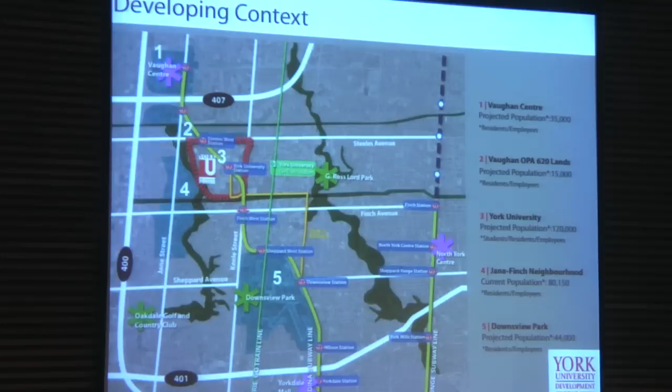Then when we move down the corridor, we see the Jane Finch neighborhood, which currently has 80,000 people. And if you look at Downsview Park, there's another potential population of 44,000 people. The issue that we're now looking at is how, with all this potential population, do we get the best quality of growth and the best economic value for our land, given the competition up and down this corridor. This is just one corridor.

If you look in the news, which is hard not to, we're talking about Sheppard coming along. We're talking about Eglinton coming along. There's enough population theoretically planned in these various corridors to take up Toronto's growth for about the next 100 years. The issue we're facing here at York is how do we capture our share in the highest quality of growth in and around our subway stations that are being built.

Whoops. Where's my slide here? Currently, within the campus, we're looking at a master plan. For our master plan, York has hired the services of Ken Greenberg and the Planning Partnership. Donna Hind is here from the Planning Partnership, and Ken and Donna have taken York through a series of consultations looking at how we can start to frame our conversation in and around the campus. And coming out of these consultations, there's three main lenses through which they're looking at the growth in and around the campus.

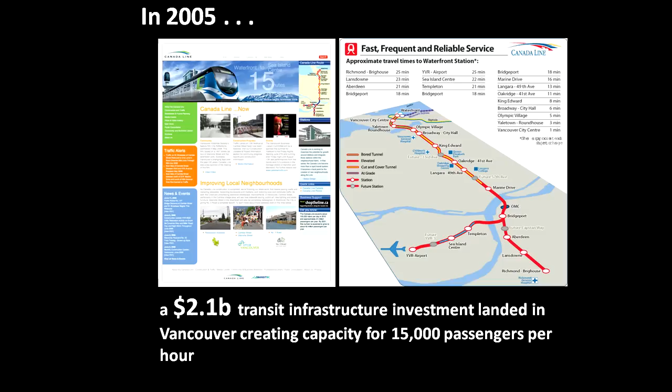So to start on this, as was mentioned, I moved to Vancouver in 2004, and about the same time a plane load of dollars landed from the federal government and other places to pay for some transit infrastructure. So in 2005, all of a sudden, I won't say out of nowhere, but we didn't have it before, a significant amount of money landed into Vancouver to create capacity for a transit line that did not exist at the time. And that transit line ended up being a very important one. First, it joined two incredibly important destinations, downtown and the airport. How important is that?

But it also passed along a street that was one of the significant heritage boulevards of Western Canada, and it also passed through many of the established residential areas of Vancouver. So it was about to reveal lots of questions and lots of opportunities here. Not the least of which was an answer to the question, how big a hole do you have to dig to bury $2.1 billion? And generally, depending on how you go about it, technology matters here. If you do cut and cover, it looks like the one on the left, and if you hire a boring machine from Austria, it looks like the one on the right.

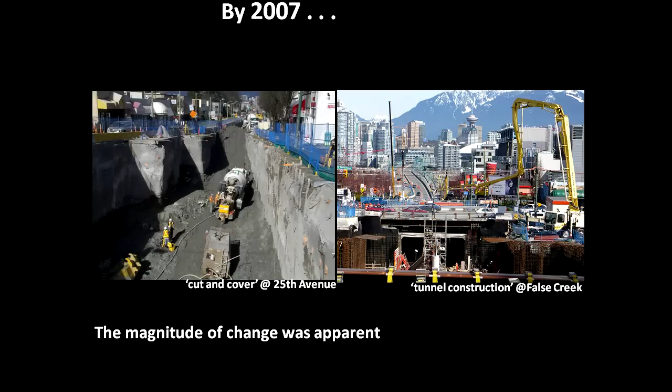Even though this dropped out of the sky in 2005, it did not take long for it to have a very large footprint and a very large in-your-face presence for many of us in Vancouver. By 2010, we'd all forgotten about the hole and all the other horrible things that happened along the way, because the line was an incredible success, far more successful than any of the transit planners had thought. There were lineups to get onto it, not just because it was a new line, but because it joined these two significant destinations, downtown and the airport, and the Olympics were coming, and it joined many of the significant venues along there. So all of a sudden, $2.1 billion creates all this capacity that people just glommed onto almost immediately.

And as a matter of fact, that line met its year 3 ridership goals in the first year and has not slipped as much as you would think. It has slipped a bit from the Olympic year, but it has not gone back to what it was before the Olympics. It's actually seen a significant increase in ridership. So there's no question this was a strategic and successful investment to have made from a transit point of view.

With that in mind, the question about, well, what kind of city does one start to pack around that all of a sudden elevates? We have a major infrastructure investment, 19 kilometers long. We have a whole bunch of people that want to ride it. What kind of a city do they want to ride to and from as they move along it?

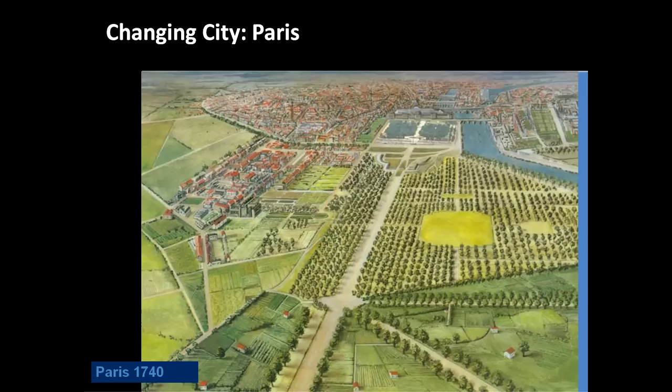And like many of you, I'm sure, are aware, there's a very significant trajectory to all the big infrastructure investments we make. And as a matter of fact, things like street networks and transit infrastructure are among the most enduring, and they last for hundreds of years. And if we just think about some of the cities we love, it's kind of humbling to remember that I'm not sure what they thought about in Paris in 1740, but I hope they thought about the right things, because Paris today still has the remnants of some of those important moves. So it was one of those moments where just thinking about how significant the choices about what city would attach itself to that infrastructure became.

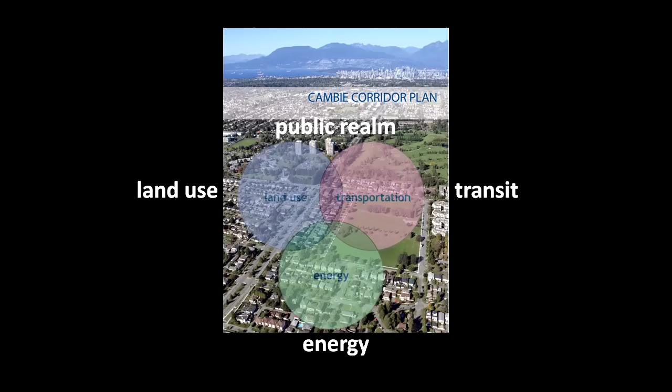So out of that, there's a series of themes that run through today's discussion. The two on the horizontal axis are the ones that are probably what you expected to hear about. That is the relationship between land use and transit, and we'll certainly talk about that. But the ones on the top and the bottom are no less related to the success of the ones across the middle. And that is the relationship between energy and the future of cities. We have to be smarter about how we plan to distribute and allocate low-carbon energy sources in the future. We need to start planning our cities around how that flow works. And then on the top, the notion that all of those investments have to create some kind of public domain in which we feel proud to inhabit.

So here we are in 2010 or so, got transit, need land use to accompany this. And just to touch on a few of the important themes here, one of them, of course, is density. And the reason I bring it up is not because I don't think you know that, but there's a little subtler piece in it that you might not think about quite as much. And that is that the relationship between transit technologies and density is basically linear. The more sophisticated the transit system and the more passengers you need to ride, you need to make sure that along that route are sufficient passengers that are going to provide the ridership that will make that transit journey successful.

So if you look on the right, the kind of system that we're talking about here, even though it's a subway, there's a big hole, it has a kind of light rail scale to it. And that's the way SkyTrain works in Vancouver. They're smallish trains and they just run frequently. So they're not long trains like you have in Toronto. They're actually quite short trains. So in order to make those successful, we're looking at places that need to generate about 150 to 250 people and jobs per hectare. And it's the people and jobs part that's significant here.

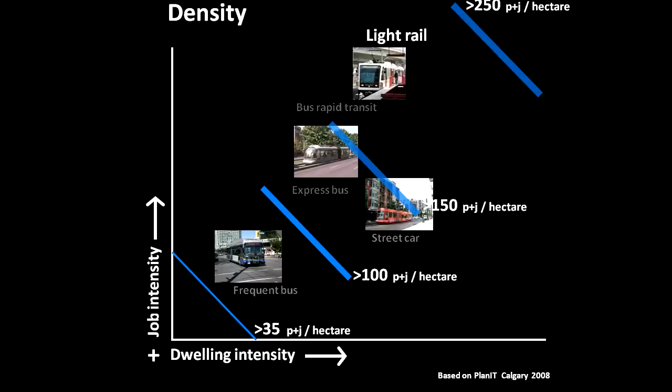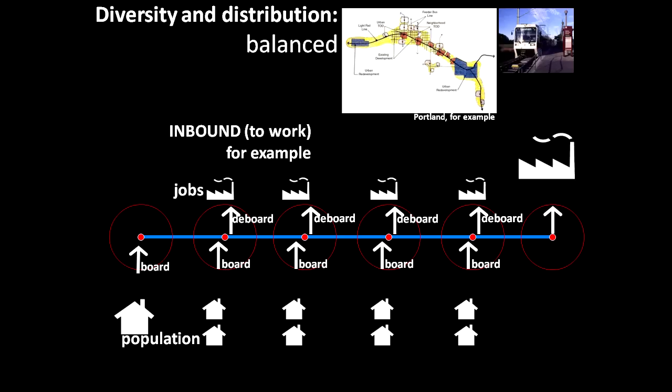So again, I don't think you don't know this, but what we really wanted to get to here was not only 150 plus people along the corridor that are likely to get on the train at least once during the day. What we'd really like them to do is get off and on at regular intervals so that the capacity of the train can be better optimized for that passenger load, right? What you really don't want is the situation like they have in Calgary, where we did some work a few years before, which does the opposite, which puts all the jobs at the end of the line and all the people at all the stops along the way. And so the train just gets fuller and fuller in the morning as it goes in, and then it's empty most of the day, and then it's full as you go back.

And as a matter of fact, our City of Calgary colleagues were always joking about the fact that if you lived beyond about the midpoint station along the way, what you'd do in the morning is take the train out to the distant suburban one so you could get a seat and read your book coming back in the other way. So not only does it make economic sense, there's a certain quality of life component to this that's not small.

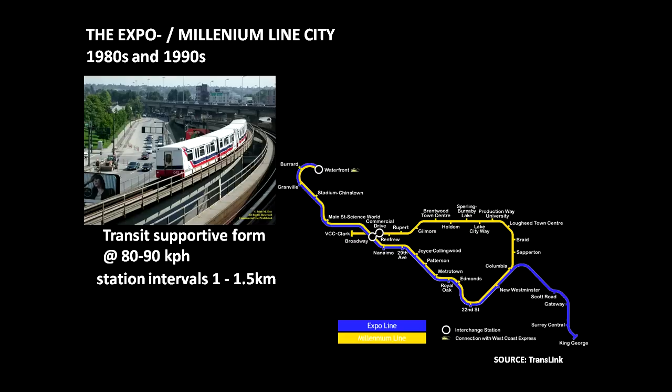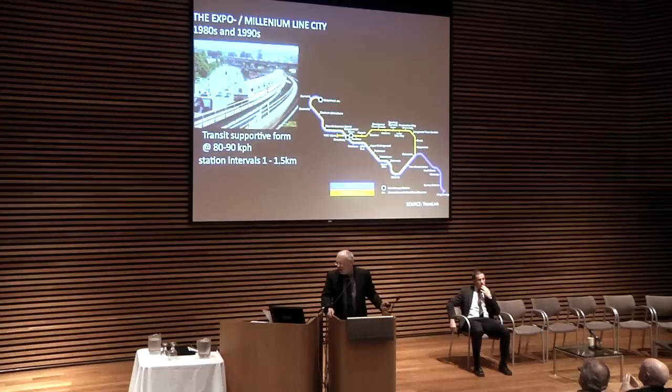The other thing is that Vancouver's had SkyTrain technology for about 30 years. And what have we learned from that? Well, what is the city that gets shaped by transit according to the way we've been shaping it by transit, at least our most recent experience? And so the question was, at least to the Cambie corridor group, okay, if we now know that if we want to move people around at about 80 to 90 kilometers per hour at stations that are about 1 to 1.5 kilometers apart, which is kind of what TransLink wants you to do, you need to start thinking about how big are those stations.

So again, if you have to get 150 to 250 people or jobs per hectare, and they need to be in walking distance of the station, that's a pretty dense little node. And depending on how far the stations are apart, there may or may not be much in between, because it may have sucked up all the development that might have happened in that area.

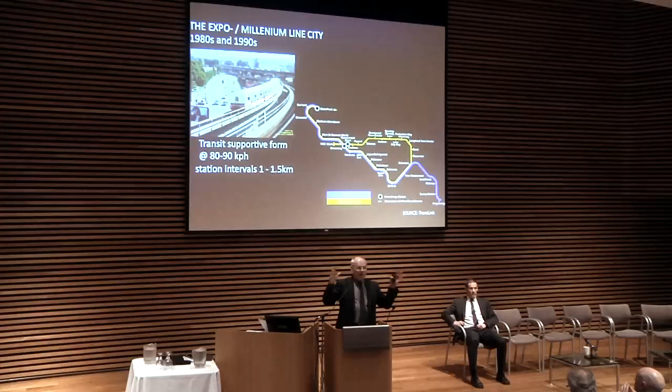So the question for the Cambie corridor team was, all right, so if we don't want to do that anymore, we need to do a better job of thinking about, well, how does the public realm have presence in this? And so one looks back at, well, how did Vancouver do this in the past? And there were times, not that long ago, relatively speaking, where we kind of got it.

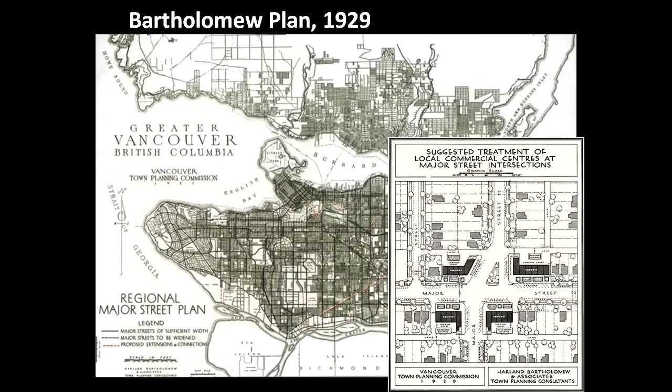The Bartholomew Plan in the 1920s and 30s really was a plan that laid out major road networks, which could be major transit networks today, and then looked at the development patterns that one might attach to them and insert in them. So this diagram, while it has absolutely nothing to do with the Cambie corridor, has a lot to do with a way of thinking across scales and thinking about how big moves that happen at a regional or city scale need to be backed up by smaller moves that happen at a pedestrian and neighborhood scale.

A way to think about this is I kind of think about planning across these scales as like the Russian doll problem. There's a scale inside a scale inside a scale inside another scale. So the question would be, if we think about how different decisions are made at different scales, what would the new transit town look like if we started to kind of look at where the flow and connectivity of decision making might be?

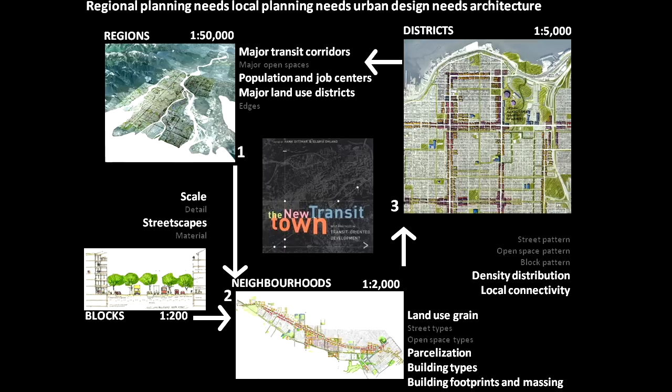So this one's way more complicated, but it's the same point. So if you kind of look at what might happen at a region scale, 1 to 50,000 maps, for example, and how there might be other choices about how those major transit corridors, population and job centers allocate themselves to specific places within that region, and so on and so on. So the trick is how do we figure out how to move back and forth across those scales, make the right decision at the right scale, or certainly not contradict them, perhaps, would be another way of thinking about that.

So that's the preamble to the plan. The last few slides before I hand this over to Jim have to do with the planning culture, and this is as much a part of a little reflection on my education about going to Vancouver as it is on something that might be useful to you.

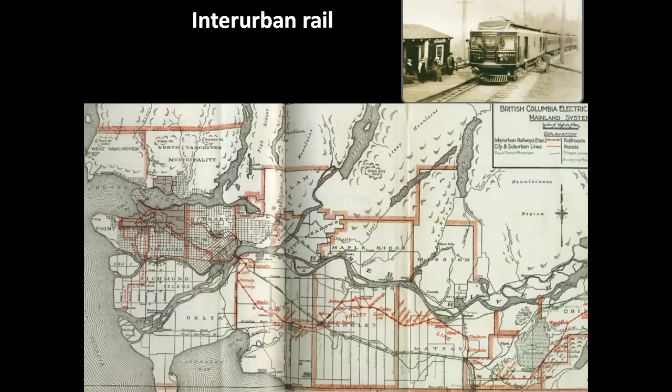But in a way, Vancouver's always been a transit town. It was the city at the end of the train line for the longest time, and land use planning and transportation choices have been so closely linked together, and the transportation choices have always come first. We think about things like there was an interurban rail network that ran through the Lower Mainland, and so the beginnings of the settlement pattern of where the major concentrations of growth were actually attached to that interurban pattern, which is the reddish area along the bottom.

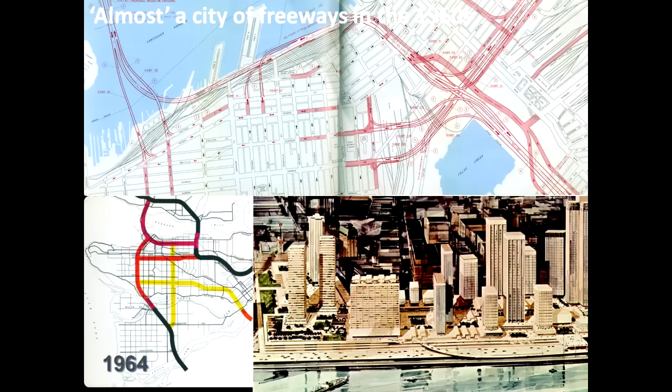And it's one of the first times that Vancouverites rose up in unison to resist something, and that freeway was stopped, and people went to jail, and there were all kinds of relationships and other sorts of forces put in motion here where the relationship between transportation and planning also had a significant activist side to it. And as a matter of fact, I'm proud to say I live in one of the few communities in the world where our regional strategic plan can still be drawn on a cocktail napkin.

So roughly after the Olympics, Vancouver initiated a series of planning actions, not the least of which was called the Greenest City Plan, which, to grossly oversimplify it today, was 10 goals, the purpose of which was to make Vancouver the greenest city by 2020. 3 of those are very relevant to planning that was happening in the corridor, and they're very relevant to our conversation today.

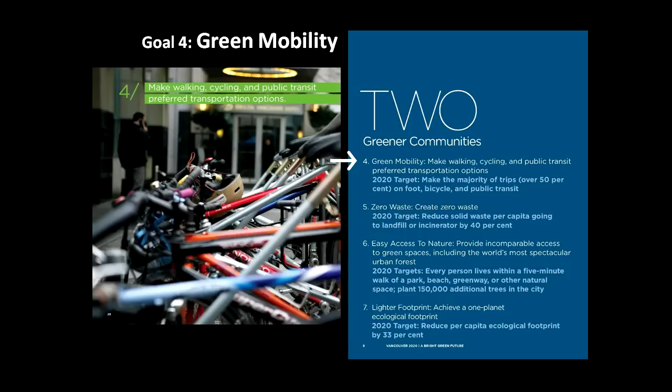I had mentioned the notion of green mobility. The big idea there is that by 2020, at least 50% of trips will be on foot, bicycle, and public transit. That's a significant number for Vancouver, as it would be for most cities, I would think. And then finally, the green buildings goal, which has to do with leading the world in green building design and construction. And let me take that one and open it up a little bit first.

Because one of the big ideas there is that by thinking of buildings in groups, we might be able to make progress against that buildings goal more readily than doing them one at a time. And one of the significant ways that Vancouver has seen some progress in that is by looking at the role of district energy technologies in helping drop the amount of energy demand, and also being able to meet that energy demand with more benign sources.

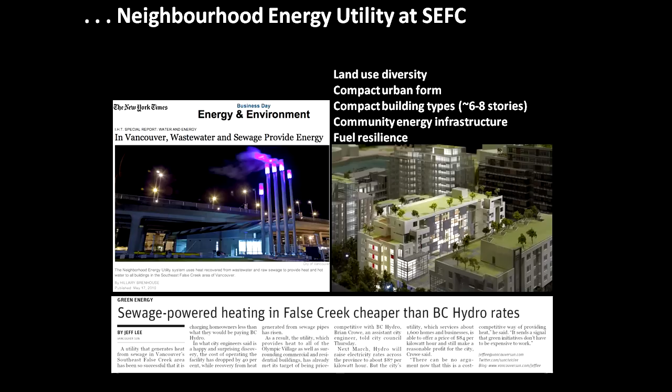So in the case of Southeast False Creek, which is the Olympic Village, it not only used a neighborhood energy utility that every building must plug into, it also captured heat by reclaiming heat energy from hot water that was passing through the sewage line. So it was completely a heat exchange system based on waste heat being generated for other purposes.

So moving forward into the Cambie Corridor Plan, the idea was that not only should we do all of what we know about land use and transportation and green mobility practices, how could we integrate some thinking around how district energy might shape the nature of development in this place as well?

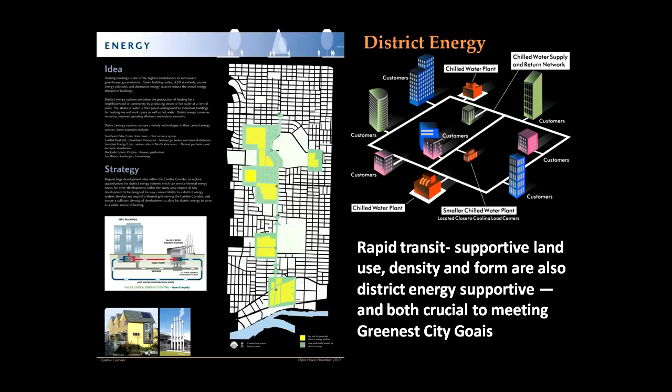And to kind of grossly oversimplify this, which is good enough for today, most things about rapid transit supportive land use, density, and form are also district energy supportive. You could more or less get 2 for 1 out of this. There are some variations, but they're definitely headed in the same direction with each other. So hence, energy, transportation, land use, public realm are now all out on the table.

So this one's a much harder one to do because designing a district energy system is a very technically complex endeavor. So we decided that the only way we were going to be able to tackle this is more or less on a benchmark basis. So we looked around at places near us and grabbed 2 comparators, both of which were in British Columbia. One was Dockside Green in Victoria, and the other one was the Olympic Village district energy utility, which I just showed you a photograph of a minute ago.

What we learned is that the heat load that those places meet was a meaningful number, because that told you roughly how many square feet of buildings, how close to the energy utility you needed to get. And so Dockside Green has 1.75 gigawatt hours per hectare per year, so that's how densely the heating energy is packed, and Southeast False Creek was about 3.

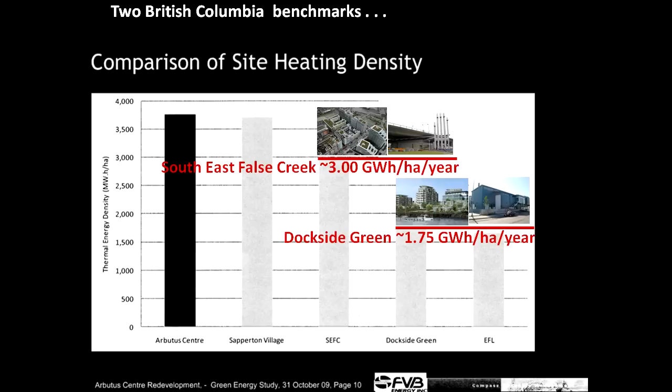And so while we couldn't do the engineering that could test this, we knew that if we could get land use alternatives that put thermal heating density between those 2 benchmarks, we had the possibility of coming back later and doing something more effective. So Jim will tell you the story of the project.

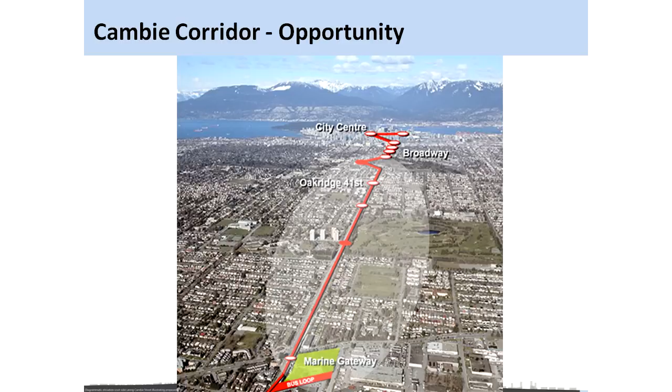Now, as it cuts through most of the city, it's going through a lot of single-family neighborhoods, really low-density residential single-family neighborhoods. So part of this plan has all been about the Ellen Dunham Jones concept of retrofitting suburbia. The big plan challenge was to go through what was established single-family neighborhoods and establish a different pattern based on the transit infrastructure.

So the plan is really based on a corridor approach, and it really represented a departure in thinking for us. Originally, back in 2005, the thinking along this line was that the planning would take place one station at a time. A new corridor approach sought to accelerate the work and to take advantage of the investment in the Canada Line. I mean, there were some things that happened that were really out of our control, and in some way the corridor approach was a bit more happenstance than actually design.

When we were looking at a station approach, the line was just being built, as Ron had said, but the city then had a number of staff turnovers, had a number of changes, and the planning department really couldn't get their act together. Then we went on strike for a long time. We had a 3-month strike, decimated our department, and we just didn't get the planning going.

So in some ways, the one station at a time approach, we said, we better get going on this, and we adapted it. It made sense from a corridor perspective, but there were also some institutional things happening in City Hall that made it make sense from just a work organizational perspective. Definitely worth noting. It's kind of sometimes the juxtaposition of luck and circumstance.

Very key to this is given the size of the study area now going along in a corridor approach, and we wanted to take immediate advantage of the areas around rapid transit, the plan is phased, and this was really critical in the work. Phase 1 provided planning principles for the whole corridor, so overall guiding principles that we spent a lot of time working with folks on for the whole corridor.

And what it also did is we set an interim rezoning policy at this time. So before we got into the more detailed planning for the whole arterial, we established interim rezoning policy at the key stations here, so Marine Drive, Langara, which is next to a college, university, a large sort of urban area here where there's a large shopping mall redevelopment and a more residential area.

We basically and strategically said, for the sites that are right at the station, we're going to allow developers who wanted to come forward with rezoning applications that met certain criteria. And what that did is it took some of the pressure off us, quite frankly, and allowed development to start happening while we did more of the planning. It also allowed us to learn from that development, and there was sort of an iterative process where the development applications actually helped shape policy. Certainly challenging, but very instructive for us as we moved along.

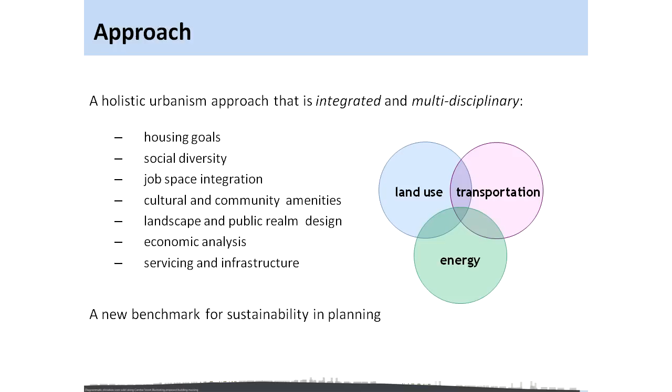One of our councillors noted that in the report there was no sustainability section. And we really made the point that it wasn't about a sustainability section, that the whole plan represented sort of a paradigm shift in thinking. Fundamental to the plan is the linking of urban design excellence and sustainability performance metrics. It wasn't just about urban design, it wasn't just about sustainability performance, and this was really what Ron's collaboration at the university helped us with.

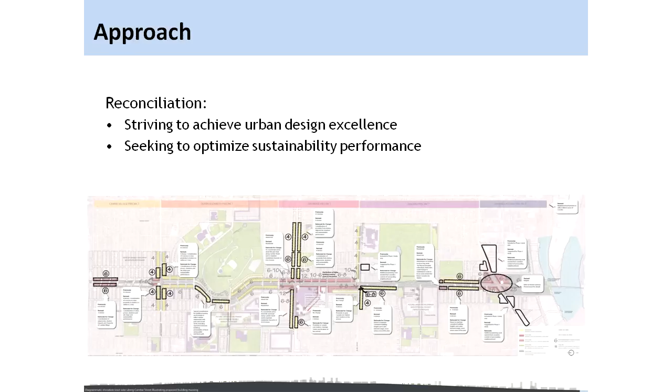The plan links building form with transit and district energy viability. We also worked hard to ensure financial viability along the way, engaging with and working with developers to understand the different economic pro formas associated with different building forms. And that was really key as well as we tried to move our way forward, those types of partnerships. The point is that the plan is about many things and has many drivers and metrics of success. And this is really key. And again, this kind of speaks to the phasing.

In phase 1, we established a series of principles. Early on, the principles were developed and adopted by Council to help guide the planning work for the corridor. They set the tone and the direction for the work that we are now presenting. So before we started talking about building forms and projection, we did a lot of work to gather consensus around what we cared about, what our values were, and they were established in different principles. So those principles included things like, and these are just the headings of the principles. We spent a lot of time with the community, and I can't stress how much time we did spend with the community with our sleeves rolled up, working hard on this type of stuff to get to the values in terms of what matters.

Those principles include things like provide a land use that optimizes the investment in transit, provide a complete community, create a walkable and cyclable corridor of neighborhoods seamlessly linked to public transit, focus intensity and community activity at stations and other areas with strategic opportunities for sustainability. This is really quite key. This is like talking about where we're actually going to put the density. This one sentence captures a lot of work, and there's obviously stuff underneath it, but it captured a lot of work and thinking and let us move forward in terms of where we're actually going to start landing things on the ground. Provide a range of housing choices and affordability, balance citywide and regional goals with the community and its context, and finally ensure job space and diversity.

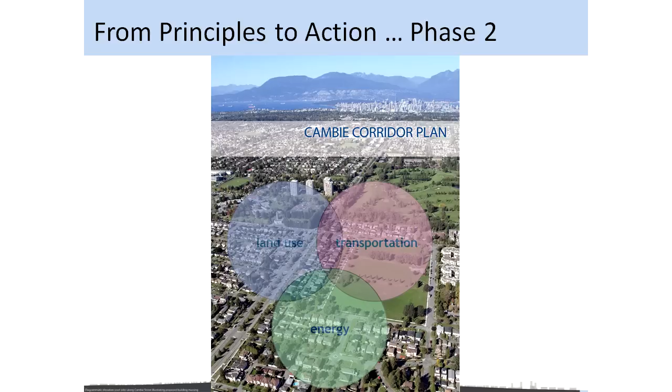Again, this is a plan not just about residential density, and I kind of joke that you could build anything in Vancouver and it would sell. It's also about job space and making sure that there's job space and destinations balanced along the corridor. And again, one of the key things that you'll see in some of the subsequent slides is that at the stations themselves and in certain zones, there's a real emphasis on landing job space, not just residential space in the corridor. So the second phase of work that we just completed, which constitutes the plan as it is today, took those principles and turned them into action. In essence, landing the principles on the ground via the built form, public realm, and social policy.

So where to start in this discussion? And I've always kind of struggled about where we start. Do we just jump into the buildings? No, I don't think that we do. And Ron hinted to the process and the real importance of the public realm, which is what really knits this together and makes it real on the ground. The plan is not just about the buildings. We know that in building complete communities, the public realm is critical.

In that sense, this plan approach sets policy direction with respect to energy, movement, connections, lanes, public places, green space, habitat, and servicing. And then it identifies the next steps to make those things happen. The plan sets a course and expects a more detailed public realm plan will ensure implementation. So let's just start, and I'll go through the different elements of the public realm that really set the foundation for the corridor.

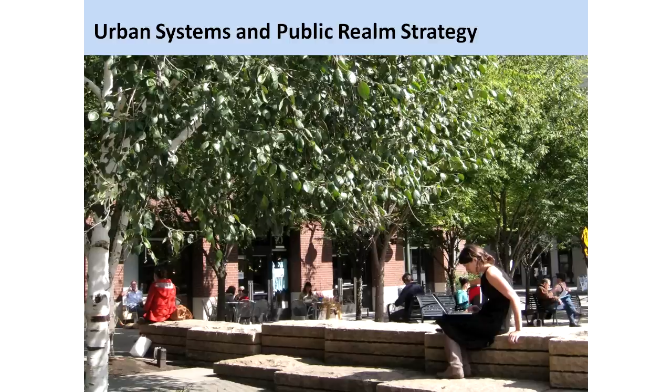District energy was really, really key, and I put it first even before some of the transportation pieces. The plan sets a framework for district energy that will take us towards a system where the energy used to heat and cool homes is provided by low-carbon, energy-efficient sources.

One of the key parts of this is that every new development along this line must be connectable to district energy systems, and there's certain size thresholds where we require developers to build district energy systems or to look at the feasibility for district energy systems that will then patch into the larger system. And we're working on implementing this as we move forward, but a real departure and key piece of the work in the plan.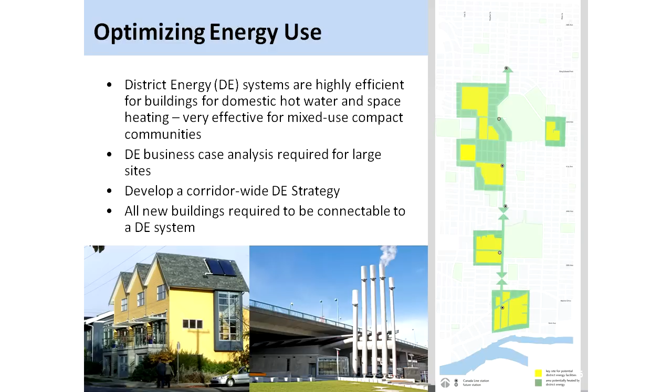The plan prioritizes walking, biking, and transit, and in that order, and this is really key, the plan prioritizes walking. When we first started this plan, one of the key design principles was that walking was first, and that spoke to the type of community, building complete communities around the stations, and that biking and transit came afterwards. And at some points when we started talking about this, it made the Transit Authority very, very nervous. They're like, we just spent $2 billion on a transit system, and you're talking about walking first?

And our attitude was, well, yeah, because all transit trips start and end on your feet. And if you can build an environment where people walk, they will always take transit as the discretionary trip, and people will just buy their transit passes, and that's proving out to be really true. And when you look to other cities where there is excellent transit, it's all about walking first.

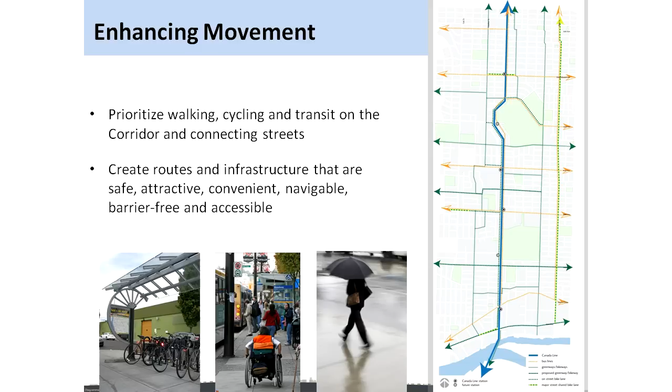The key things, though, was that the infrastructure was safe, attractive, convenient, navigable, barrier-free, and accessible. And I'll go back to this one actually, you'll notice the diagrams, it's not just about the line itself, the north-south, it's very much about the connections east and west and the connections to different destinations. Part of the fundamental piece of this in terms of the movement network was the relationship with the corridor and then how you get off of it to the different destinations, whether they be places of amenity, places of employment, places of jobs. So really quite a key structure there.

Connections, again, was very key. Connections to nature and parks are provided, including an emphasis on breaking down blocks to provide access to green space. We set a real tone with where some of the longer blocks are and how we want to break those down to have a finer grain pattern where people can walk and bike.

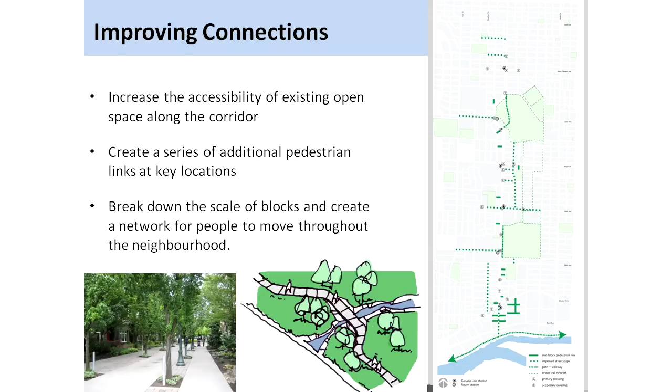The Bartholomew plan that Ron showed Vancouver as really a grid city, but one of the key things when you start to squint and look at that plan is there's a lot of lanes in Vancouver, and in fact the whole urban fabric and pattern is dominated by lanes in the city of Vancouver. And this plan has a strategy in it to engage those lanes instead of turning away from the lanes, to make lanes active, lively places, also balancing with the need to service buildings. So our strategies shift as you get from a commercial area to a residential area, but certainly there's a lot more emphasis on creating lanes as active places to be.

One of the things that you'll notice with a lot of the building forms, frankly, along the corridor, is that where there are lanes, if you, for example, had a 6-story building fronting on the main arterial street, there's a 6-story building, a courtyard, and then a lane row house fronting right onto the lane with maybe just a 2-foot setback from the lane. So there's actually a housing form on the lane that changes the whole nature and character of those lanes. And that was a long, tough discussion with our engineering department, but we have a very progressive engineering department, and we've found ways to implement and balance off issues of servicing and access with them. So it can be done.

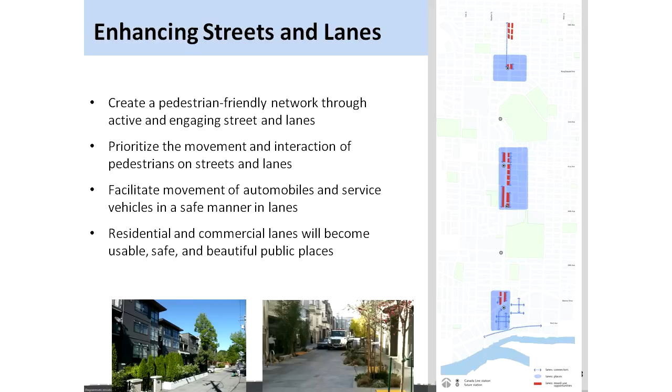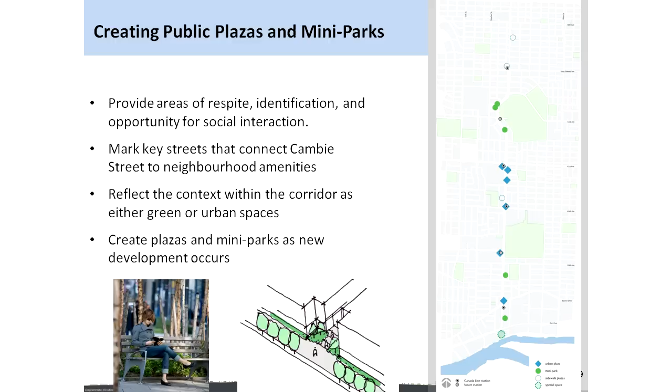The key piece, too, was that there's a series of plazas and mini parks provided throughout the corridor, offering important areas for social interactions. The plazas are really varied in character depending on where they're at, and really represent the place where people would go along the corridor. We had Jan Gehl out to look at this, and he said, yeah, this plan, don't worry about the buildings. What makes a city great is where you sit and have a cappuccino in your plaza and watch the pretty people go by. That's what urbanism is about. So we've tried to create those spaces in this corridor as part of the fabric that links it all together.

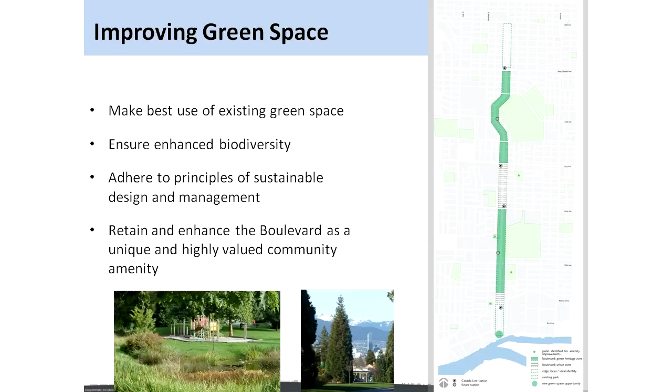Green space is prioritized. I mean, Vancouver is an extremely green place, just the aesthetic of it. So we had to work really hard to make best use of existing green space, adding green space where possible, and ensuring the protection and enhancement of the Heritage Boulevard.

And finally, a habitat strategy is provided, and the habitat strategy looks at both aquatic and terrestrial habitat, so land and sea. The Fraser River is in the south, so there's a lot of work looking at improving the riparian habitat along that, looking at daylighting streams that go and connect to that area. It's definitely part of that work.

And creating building guidelines that talk about things like rainwater management, so that the whole stormwater system is linked into an overall system that improves riparian habitat, as opposed to just a functional get it to the river as fast as you can.

Key to this plan and central to it is the commitment to social diversity and resilience. The plan provides important direction on pressing issues such as housing, affordability, and social inclusion. And the work acknowledges that continued enhanced livability and affordability are key to the resilience of the corridor.

And one of the key pieces of this, and this is a really interesting piece moving forward in terms of how we're actually implementing this, is that there's an affordable housing strategy for the Cambie corridor that really tries to get at the whole housing continuum, so that low and moderate income families, key workers, seniors, and those with impaired health or mobility can continue to find good housing options in the corridor close to transit.

So what we've done here is we've set a target for rental housing at 20%, but we had a bit of a nuance on that, because in our economic testing, which was really part of our key discussion with developers and the industry, we didn't know that 20% would work in all opportunities, if 20% rental housing was financially viable.

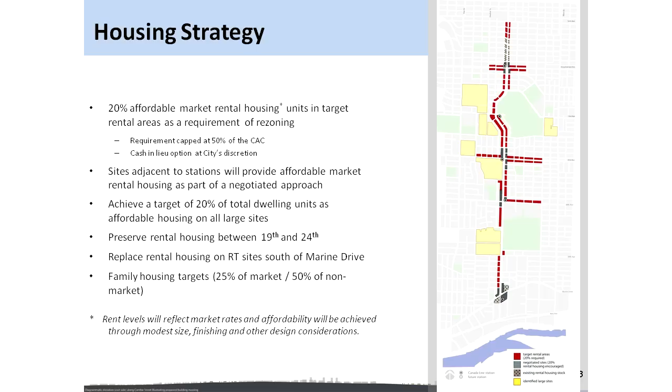So in terms of built form, and this is really key, Vancouver is known as a city of neighborhoods, and it really is kind of stuck in our culture and in our thinking. And so this plan very quickly went from being a corridor to a series of neighborhood plans. It kind of drove me crazy, because instead of going to one set of meetings, we were going to 4 or 5 sets of meetings to deal with the neighborhood issues along the corridor. So it just became very tiring, and my wife didn't see me very much for a while.

So the idea is that Vancouver is a city of neighborhoods, and so the built form responds to the character of those different neighborhoods with diversity in each of those different points. The other thing worth noting is the built form response marks an important departure from what I call Vancouver 1.0, the podium tower. And the predominant typology on Cambie is a mid-rise building with sensitive transitions to the surrounding neighborhoods.

We took a lot of what we learned from Southeast False Creek and other mid-rise developments like the Arbutus lands, and said, instead of downtown postcard podium tower, this is going to be much more about a mid-rise typology in a lot of places with different distribution. Still towers in some places, but it's not your buzz cut 6-story building. It's 6 and then a tower, 6 and then a tower, 5, and then with different setbacks and spacing depending on where you're at in the corridor.

So what I'll do now is run through some of those neighborhoods to kind of give you an example of what we're talking about. Really key to this, and I'll just look at my time here, was what we did and what we talked about. And so we showed people graphically a lot of the work that we did.

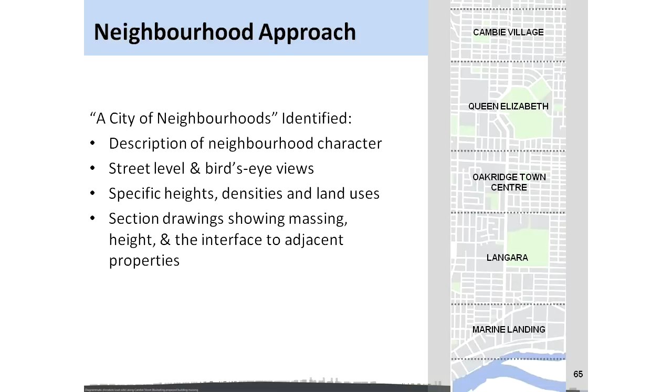The section drawings are really, really key, because one of the key pieces of pushback was the relationship to the adjacent properties. So we had to show people sun angles, relationships, and how those things worked. So I'll run through those quickly. So Cambie Village, an area in the north of the plan, fairly low, 4 to 6, 6 to 8 stories, showing the sections. Some job space here, but not a huge job space generator.

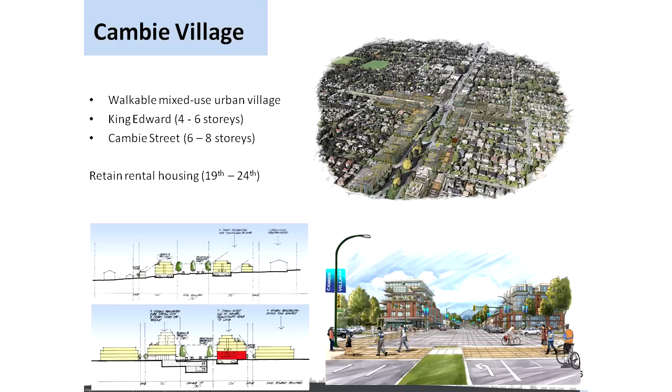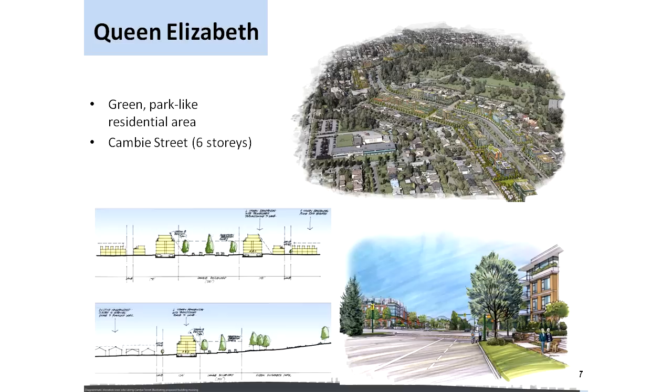Queen Elizabeth Park, another area going around, sort of a ceremonial, meandering boulevard next to a park. Very green, very open, but again, large setbacks here, a 6-story typology. Oakridge Town Centre is where things really start to get cranked up, where we have a large mall site redevelopment that we expect. And right now there's existing policy that has towers on it up to 24 stories. I expect that will be revised to see more aggressive density on that.

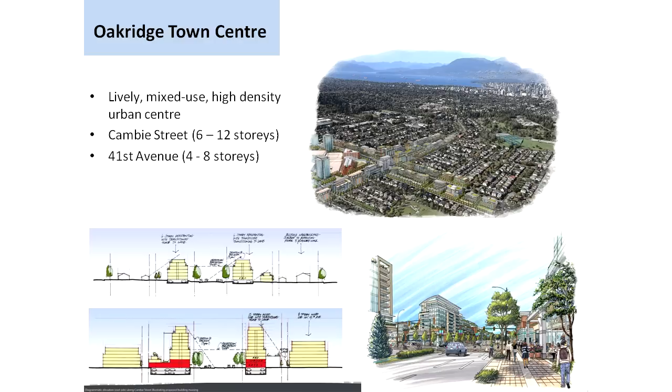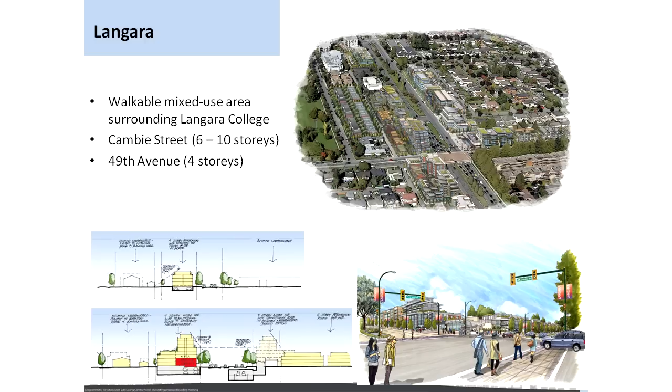But really getting into some very significant densities along this area with just the surrounding kind of background buildings in the 12-story range, going down to 4 as you kind of peel away from the corridor itself. Langara College Station, very close to a university, so kind of making sure that we're connecting into that relationship and the ridership that the university generates, and the body heat from that.

And Marine Landing, where again this is sort of the end of the station, right on the corridor, where there are a number of towers planned, and this is some of the towers that are planned, ranging in sort of the 285, 300-foot range. There's a tower at 335, and a number of large office developments at this site.

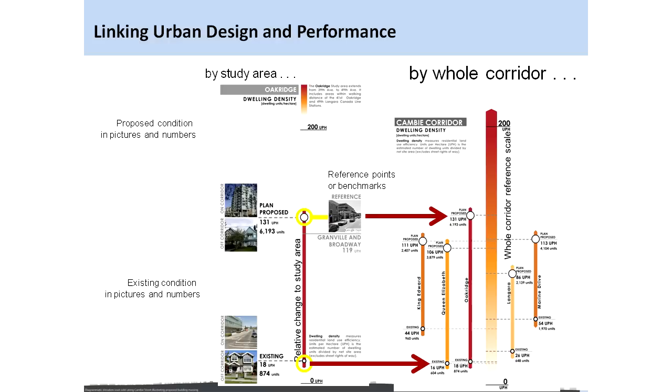For all of these areas, and this is really key, and again, the work with Ron, very important, the plan sought to reconcile the graphically displayed urban design with the sustainability performance. And our partnership with UBC was critical in that regard, and Ron can describe it a little bit later. Also, the public consultation process was very broad and robust.

We built on our Phase 1 outreach with the principles and talked to a lot of people about the built form, and showed people very graphically what we were doing and really tapped into people's values. We used the tried and true methods, open houses, boards, that type of stuff, but also tried to get into a younger audience with social media, films and web coverage.

The other thing that's worth noting too is just the kind of the diversity of this corridor. About 40% of the people on the corridor, their mother tongue was Mandarin or Cantonese. So we had a lot of kind of multicultural outreach that we really needed to get into, and that was a very challenging piece of work as well, but one that I think that we pulled off.

So now I'm going to touch on how we did this, how we approved the plan, and how we got to yes, what I think are some of the really key elements in this moving forward. So within City Hall, I don't think this plan succeeded because of the planning department. I think it succeeded because we were able to bring together departments from the whole city to shape directions. We had buy-in from our senior management team, which is very key in terms of providing direction and kind of forward movement.

Oh, hang on, I went too far there.

At our staff level, we created a technical team with representatives from various departments: housing, sustainability, engineering, social development, and parks, to wrestle with the associated trade-offs. We had a lot of buy-in at a corporate level and as a planning department.

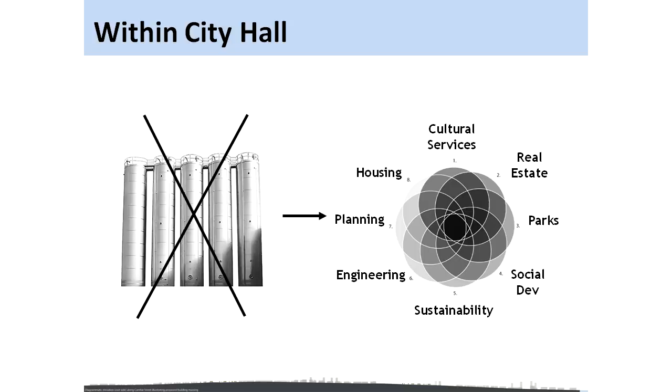Involving the current and future public, and this is really, really key to this plan, and it wasn't just about engaging with the people who live there now. I think one of the reasons why this plan succeeded was because there was a significant emphasis on engaging younger people. As the plan was future-looking, we worked extremely hard to connect with people generally under the age of 35.

So predictably, we would have open houses that included boomers interested in protecting their status quo property rights. But to balance this perspective, we worked hard and we went out to people. We knocked on doors and we talked to a lot of people, engaging students in university and high school.

And again, this connection with the university was very key because the students were very plugged into the discussion, became very good allies and third-party validators moving forward, and they participated in the dialogue. Again, as housing affordability and choice are pressing issues in the city,

finally, we worked very hard to establish a link to the professionals, advocates, and academic partners, including people in the design and development industry, to have them around the table participating in the discussion. They really acted as very key third-party validators. And again, a ton of work went into this. We engaged thousands of people and worked very hard to have discussions with folks. The voices were critical, providing third-party validation of the concepts staff were presenting.

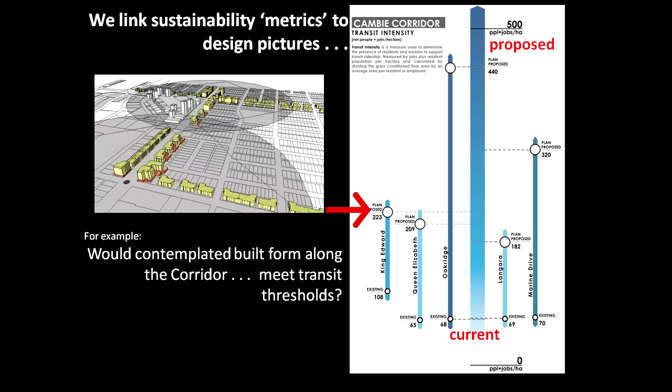And then we made these visualizations of what happened if you did those things. So all of these are always to the same scale. And they always show at the bottom where the plan is at the moment, where it says current there, and they don't all start in the same place. And then the length of the line is how much that place moved against that criteria because of the planning instruments.

So in order to do that, we had to be fast about this. So we used a method that we use in our academic approaches all the time: a case-based method. In that particular case, no pun intended, we collect a series of examples of all the different land use types or building types or street types that are being discussed, and we begin to find ways to connect the pictures and the 3D models to the numbers, so that people who get the numbers can now see the pictures, and people who get the pictures can now see what the numbers associated with them mean.

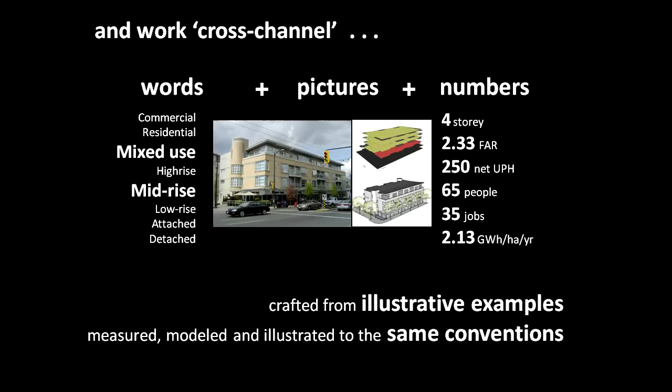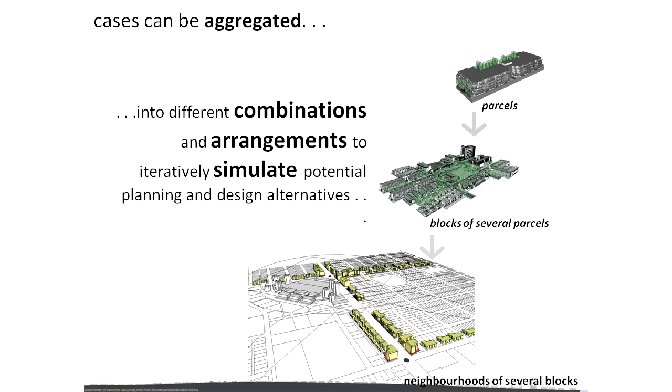And these are actually real, living, breathing 3D models, and they have data associated with them. So what we would do is listen to people say, well, we don't really want 6-story buildings in that segment of the block. Let's put them at the end of the block. So we would take cases that had that dimension to them, and we would literally rearrange them according to what people were saying. And because these all have data associated with them, we can measure stuff about them. We can tell you how many people lived there, how much thermal density was created by that alternative, et cetera.

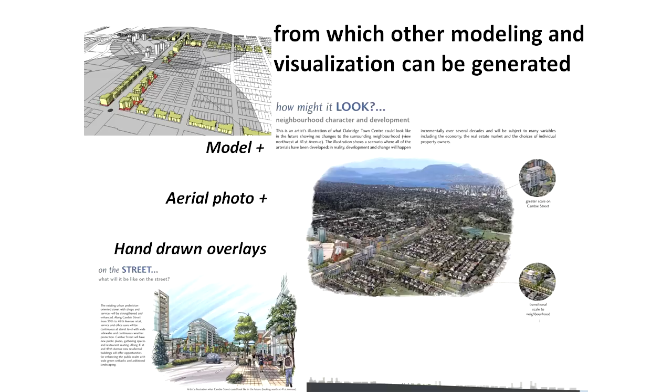And Jim mentioned this, and the only reason I bring this up is because I thought this was an interesting spin on our particular way of working. The city wanted more accessible visualization, so we worked with an illustrator, and the illustrator took models like that up on the top left and air photos and then created these visualizations on the right. Now, the mind-boggling thing is that the working surface this person made these things on is about that big. And so she took a rough sketch that was about the right size that we knew was truthed against the numbers, and then she would innovate on that. But again, we were confident that the pictures looked like the numbers, and so our anxiety level went down.

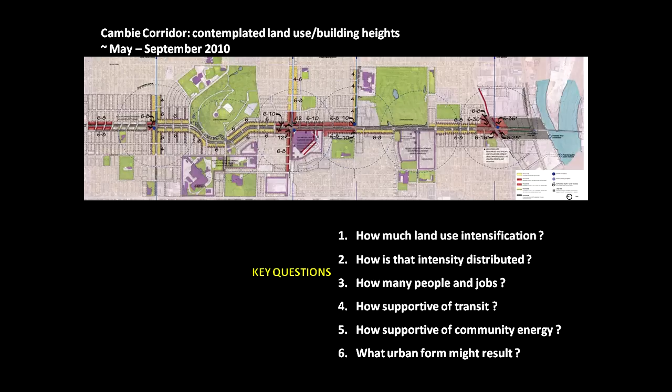So the kinds of questions we were presented with were things like this: how much land use intensification, how was it distributed, how many people and jobs really? Is it supportive of transit at the end? Is it supportive of community energy? And what did it look like?

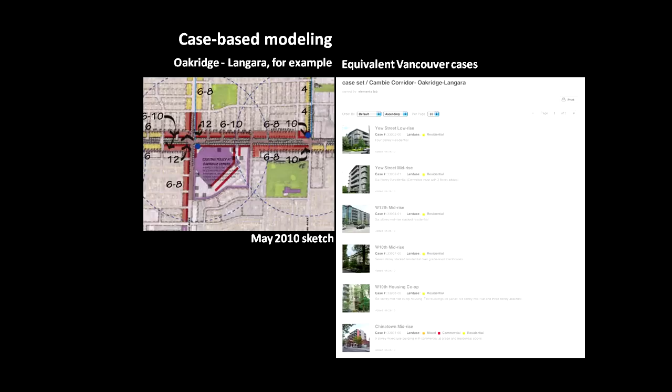So again, these are examples of buildings that are actually in Vancouver that have been built, most of them recently, but not always, and they represent the kind of built forms that were in the diagrams that were part of the planning discussion. And then these were dropped into that three-dimensional model with the data being pulled out of it. All the numbers were extracted, so you could not only interrogate the corridor, you could look at the building type, and out of that were created these histograms.

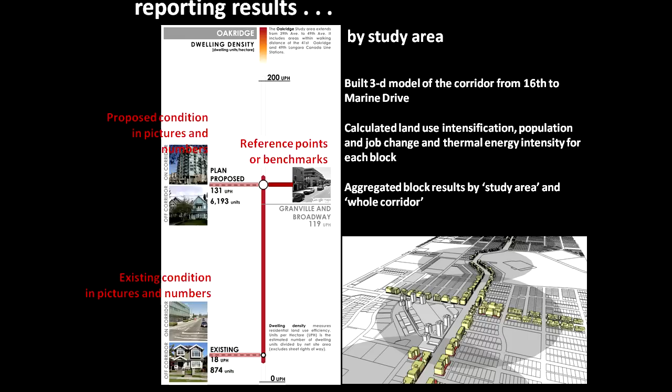So in this particular one, there was one histogram for each stop. So this is Oakridge, and there are pictures of what it looks like now at the bottom. There are pictures of the building types that are dropped into that model. And in cases where we could provide one, we went and found another part of the city that was about the same performance, right? They may have very different building types, but it was just a way, again, to truth the numbers against the appearances.

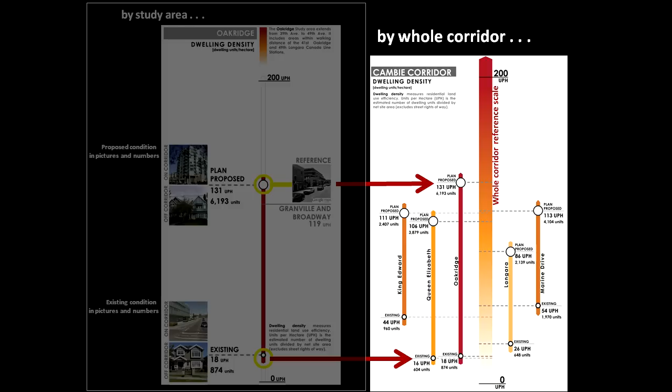And then we showed people not only how that stop performed, but how that stop would compare with all the other ones along the way. And again, the Oakridge one I just showed you is the one that changes in density the most relative to all the others. So you could see, oh, the shopping center took most of the share of the population and jobs. We didn't gang up on the neighborhoods at 25th and whatever. And we did the same thing with dwelling density.

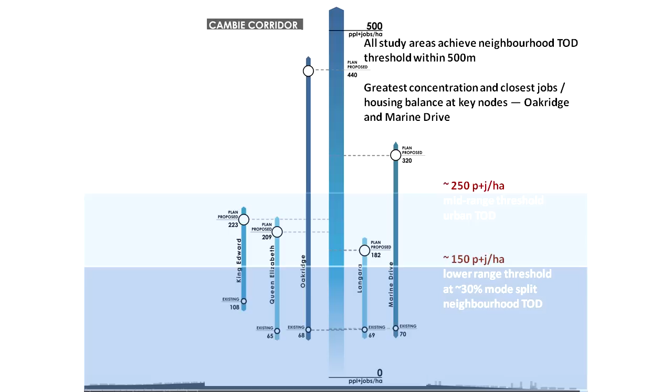We did the same thing with transit. And again, with the numbers that we discussed earlier, all the stops now fell between what we considered to be the lower range and the upper range. One of them went to the upper range, which was the one that Jim showed you at the end with the big looming employment towers at the bottom. Because that was an employment center, no one thought that was a bad thing. It was just about the right distribution.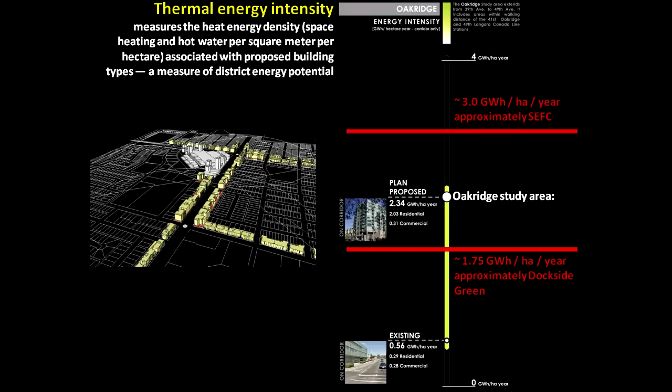And from the district energy point of view, again, the two benchmarks we looked at: on the bottom is Dockside Green, on the top is Southeast False Creek. That particular transit stop that I just showed you the example of a moment ago fell somewhere in the middle. But if you backed up and looked at all the stops, what you discovered is that with a few exceptions, King Edward would be one of them, which was the 3 to 4 story example, they all were likely to be able to be met by district energy planning at the same time.

So what have we learned? What's happening now is kind of learning in real time, and this is where things get interesting, because the total disclaimer on this is that nothing's been built yet. The plan was approved about 8 months ago. This summer, I think the development will get significant and serious, and we're going to see some significant transformation along the corridor. So I'll quickly go through some of the development applications that we're seeing and fielding. We have about 8 rezoning applications in, about 20 inquiries, and things are definitely heating up along the corridor.

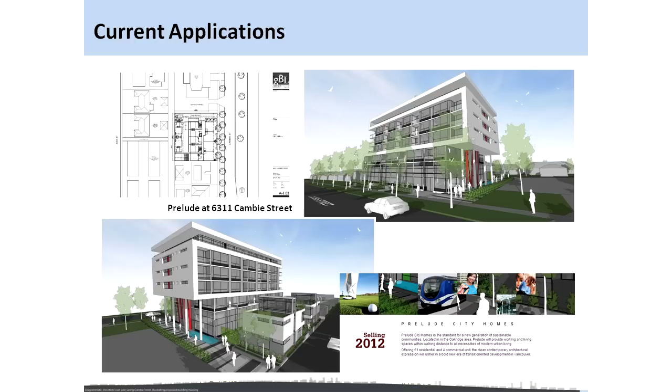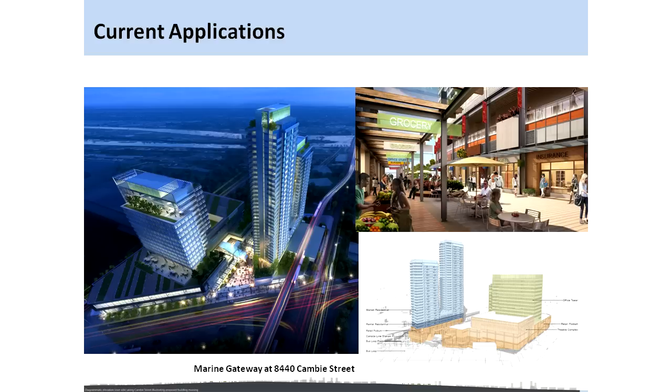So this is just one example of a 6-story building in a commercial area. It's an interesting story because it's the 2-lot consolidation of some 1951 one-story bungalows that are going to a building of about 67 feet high. Goes from property line to property line on the side yards, a significant urban building. This is a different form in an area right adjacent to a station. This is a development by PCI Developments, submitted by Perkins and Will. Two residential towers and a significant office component, bordering on an industrial area, in an employment area in the city of Vancouver at the south end of the line.

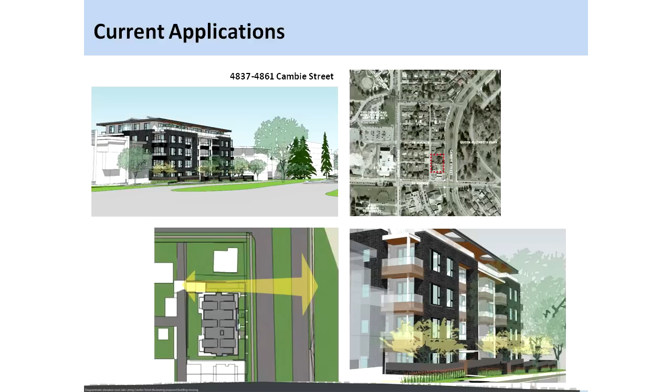This is an application close to a park, and so you can see the responses to these things in different areas. So this is close to a park, lower scale, dealing with views, bigger setbacks. It's only a 5-story building. I believe they're coming in totally under wood frame construction. We haven't nailed that down, but it's a smaller building with about 41 units in it. So just a whole diversity of different applications moving forward.

Here's one of the big rubs right now, and it's an interesting challenge. One of the challenges that we're facing as this plan starts to get implemented is the issue of real estate speculation. Property values have significantly increased along the corridor once the plan was approved. And of course you would expect that. First you have the transit investment, so property values are going to rise anyways, and then you have an approved plan. But it's the magnitude on which they're rising that has us a little bit concerned. So remember, this is the Vancouver context. Properties that a couple of years ago would have sold for, like a single family house on the west side, about $1.5 million, are now selling in the range of about 3.4. A couple have sold for about $4 million. So there's some significant sales.

I know, it's crazy. And so one of our biggest challenges, and we're working very hard with the development industry on this, and we're even looking at some new tools, is to ensure that primarily the vendors and the developers are aware that as part of development, the city will be working really hard to ensure that the community amenity contributions are going to be reinvested back into the communities, and that the development cost levies are part of that equation. The developers are aware of it, but the people who are selling their houses, who want a piece of the action, also need to be made aware of that. And we've been talking to an awful lot of folks about that. Right now we're somewhat concerned that these development contributions are not necessarily getting reflected in sales prices when houses are getting sold for approaching $5 million.

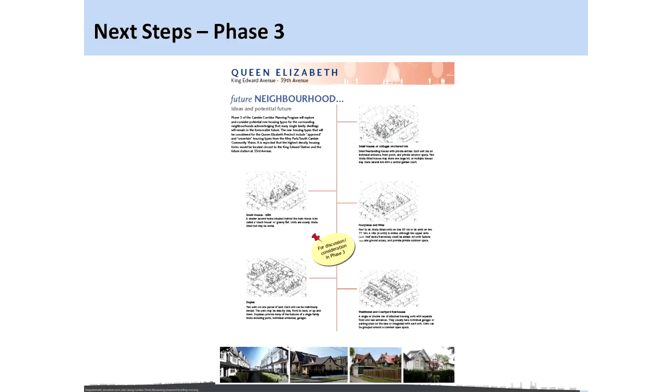There's a couple of situations where a group of 30 neighbors have got together, and it's a tough thing on the west side to consolidate 30 single family houses. And they said, look, we've done this. We have a deal. Can we come in and talk to you about the redevelopment of our site? And it's kind of like, oh, okay, that's interesting. I didn't necessarily expect that would happen in the first couple of years, but it's something that's definitely happened, and it'll definitely affect our planning as we move forward.

So what are we taking away? What's worked well? I think that the phased approach was critical, and sort of this strategic incrementalism moving forward. Getting the important pieces chosen and in the right place was really critical. Set the tone, let people know that we were serious about direction. It also allowed our council to not have to make all the decisions all at once.

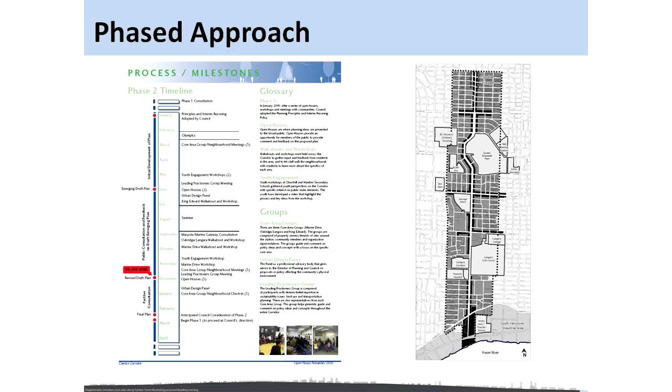It was a very one step at a time type of thing, where we're going to get the principles right, we're going to get buy-in, everybody around the table is going to nod about that. We're going to get the public realm stuff right, we're all going to nod about that and understand the relationship between density done well and amenities. And then we're going to introduce the built form, right? And so it's the bringing along of those different pieces in an incremental phase that really paid off in a big way.

This is also really critical. I think maybe one of the most critical things of all is bridging the gap between the urban design, where we spent a lot of time showing people what things look like, and the sustainability performance. Basically, the approach allowed us to provide a defensible metric for density.

And so, you can imagine you're out at a community meeting, and in the culture of Vancouver, people will say, oh, no, we want to do density, that's fine, but let's just do townhouses. And so you say, okay, you run the numbers on townhouses in terms of how it performs from a sustainability perspective in terms of transit ridership and district energy.

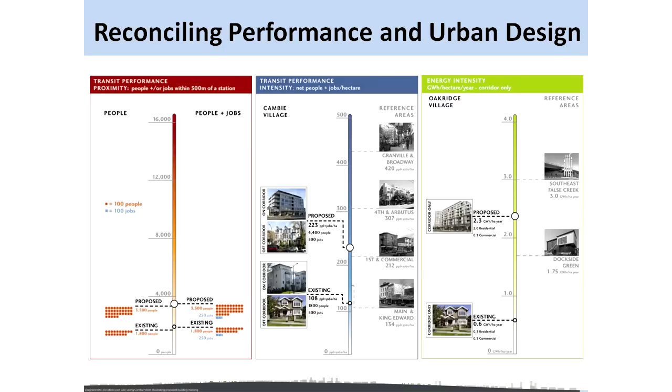We work with our third-party colleagues at UBC, and you get to a point where it's just, hey, that's just not going to cut it. And then staff has a defensible way to go to council and say, look, we've heard you, we understand, but if these are our big picture goals and our principles, what you're suggesting isn't going to get us there, so we need to do more and better.

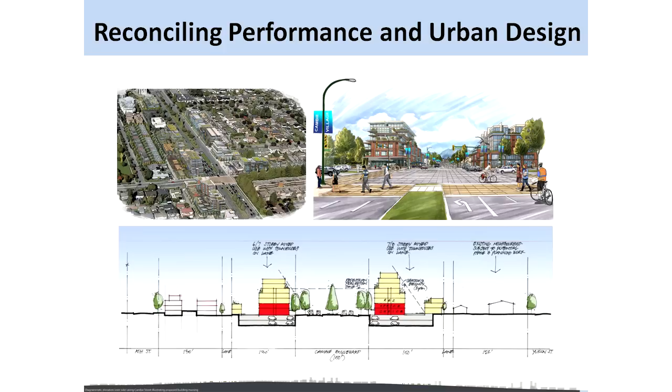So this work allowed us to provide that metric, not only showing through the histograms, that type of stuff, but really reconciling it with the urban design piece and showing the link between those two things. Finally, and again, I think this is critical and really appropriate that we're sitting at a place like this in a university, the third-party partnerships and validators were critical, not only in industry and in the community and the usual suspects, but the university and Ron's work was absolutely critical. It kind of, in some ways, knocked it out of the park for us.

Again, Ron talking in front of council, sometimes people, even your own councillors, don't necessarily trust the planners, and to have people have it as their plan was really critical. There was buy-in, public buy-in, but the third-party validators, not just experts, but community folks, all those types of people, and again, the university and academic partnerships were really, really key. And it opened up a more honest conversation in terms of what we wanted to put forward in this plan. So validators there, sorry, I wasn't on that slide.

So thank you very much for this. We went a little bit over time, but I think it was valuable. I think that this work in terms of the City of Vancouver could really signal a new way in terms of us moving forward. I think that the work of a number of our planners, including Lil, this reconciling of performance metrics and visualization was very key. And I think it opens up a new chapter for us in the City of Vancouver, and hopefully we can all learn some lessons from this. So thank you for your time.

Thank you very much. It's been a great experience. Thank you.

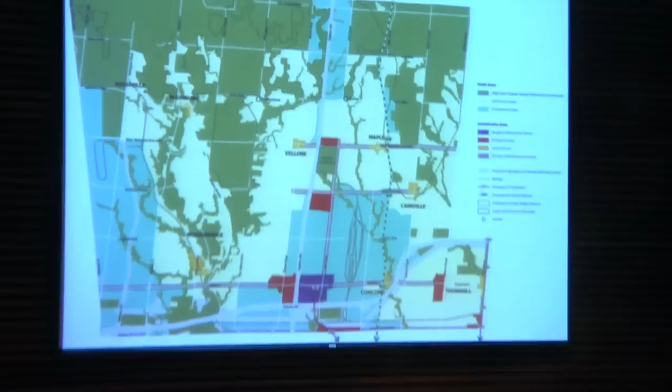The aspect that I want to talk about tonight is what was experienced in the Cambie corridor example has also been experienced in Vaughan, and that is that if you build higher order transit, you will get development. And I have some actual examples that I wanted to show you, and that the converse is also true, that if you don't build it, you will continue to get primarily very suburban forms of development, because you need this kind of initiative to precipitate the kind of urban development that these outer GTA municipalities are all trying to encourage.

And there's something interesting in the Weekend Globe that I came across, an article by Adrian Morrow, who said that the TTC in Toronto carries nearly 3 times as many riders as all 9 other transit systems in the GTA and Hamilton combined. And Toronto's streetcar network alone carries more people than the entire GO system. However, he went on to say the population of the GTA and Hamilton region is expected to grow by 2 million, most of whom will settle outside Toronto by 2031.

So our challenge is, how do you achieve an urban form, a concentration of urban development without necessarily having that complete transit infrastructure in place? However, what's up there is our urban structure map, and what it shows you is this massive green area, countryside, green belt, Oak Ridges Moraine, that is protected countryside to the north. We concentrate development to the south. We have a very small urban boundary expansion.

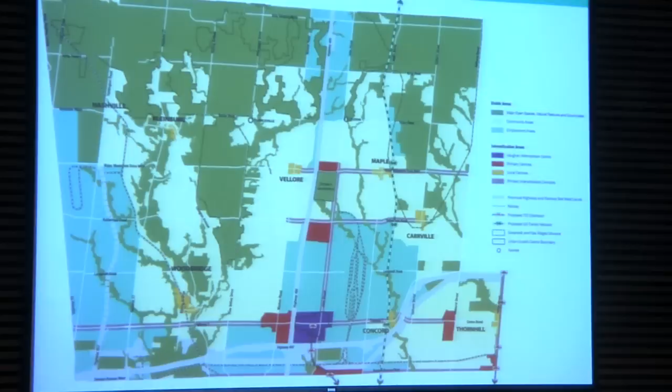This is very similar to many GTA municipalities, or similar approach to what we're taking, although our structures vary according to particular circumstances. And what you also see are sort of patches of color which represent our local centers, primary centers, and the purple patches are Vaughan Metropolitan Center.

And we have a series of transit initiatives, which our plan responds to, which is the Viva Next higher order transit in a dedicated right-of-way all along Highway 7, which links Markham through Vaughan to Brampton, the extension of the Spadina subway up to the Vaughan Metropolitan Center, and a station at the 407 and a station at Steeles West. And then we have a rapid transit corridor up Jane, another one along Major Mackenzie and Rutherford Road. And then we have the GO line, which is planned to be twinned at some point. Currently, it only goes in one direction.

And so, oh, I didn't want to do that. Let's see. Okay, that's the only other slide that I'm going to show.

And I wanted to talk particularly about the Vaughan Metropolitan Center, the Steeles West Plan, and the Yonge Steeles Plan. All secondary planning exercises, very, very similar, in fact, to the Cambie exercises, in all the things that one needs to think about. And the example of the Vaughan Metropolitan Center, because the subway is coming to it, we're planning for 12,000 units and 135,000 square meters of office by 2031. It would double by 2051, and the 2031 number is the 200 people and jobs per hectare, which is the urban growth center target. Target is 400 people and jobs by 2051.